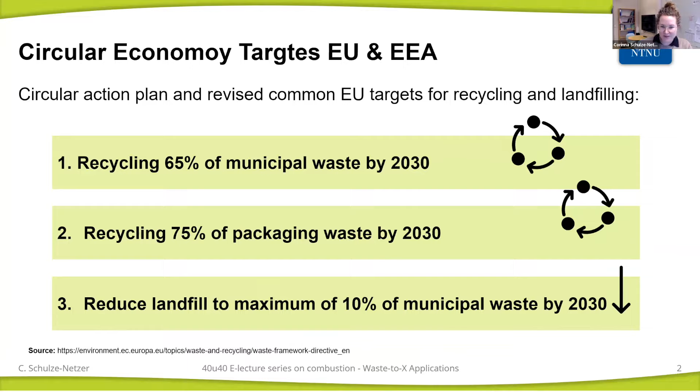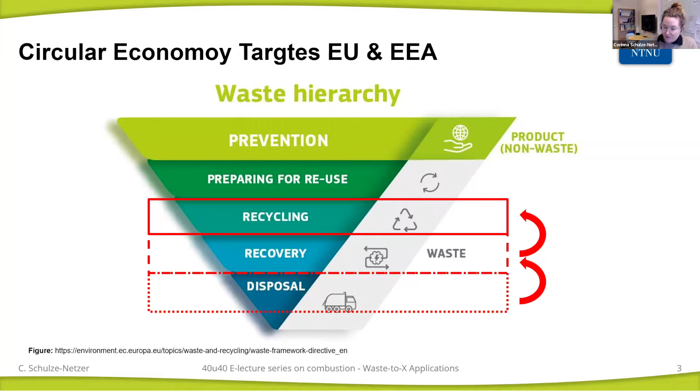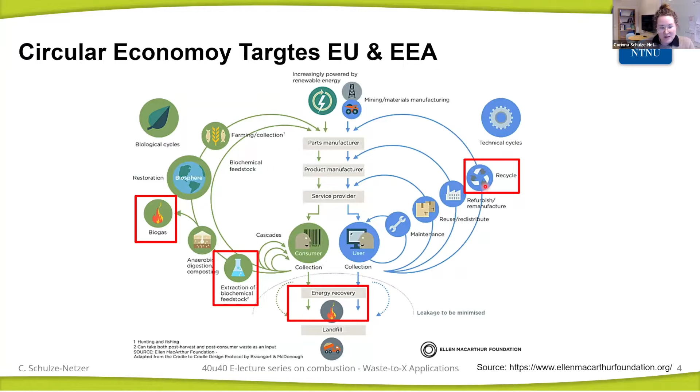So we have the typical flow: we mine resources, we have products, us as consumers, and in the future we need to increase the stock and recycling of mined materials, but also of bioresources. I've marked here all the processes that I see the combustion community as important to work on—energy recovery, directly burning waste in incineration plants, but also extraction of bioresources and biogas usage, and now with new trends in chemical recycling for plastic, being part of the recycling chain. These are all the fields I work in and that I base examples of in this presentation.

Nowadays, we also look more and more into sewage sludge. This has different reasons. We find more microplastic, for example, in sewage sludge. We also find more hormones or residues from pharmaceuticals, which question now if we can directly bring it out to the fields as we used to, or if it's better to treat this first chemically, get rid of pollutions, and then use only the nutritious part to go back to the agriculture.

Then there's refuse-derived fuel. This is basically a form of municipal solid waste. It gets selected specific materials, for example paper or plastics are combined and then put into this more convenient form. This can be used in any kind of firing process. It can be used in the cement industry, for example, or other high temperature applications in industry.

And then we have plastic waste, and we're talking here about the ones that are not recyclable. So everything that goes through classical mechanical recycling should go through there, but we're talking here about food packaging, for example, that consists of different layers and different polymers in one packaging. These are really difficult to recycle mechanically, so here we have huge potential to do that chemically, thermochemically. And then there are many more of these feedstocks, all the waste feedstocks that you can think of.

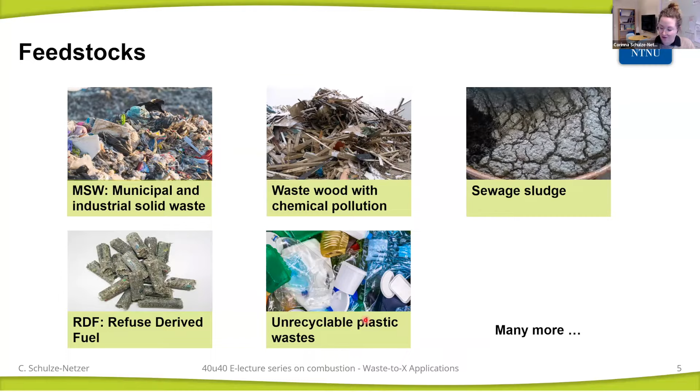And then we have the different applications. Once we have defined a feedstock in a way that we can use it in our numerical methods, we can then go for waste-to-energy application, pyrolysis and gasification for energy applications. Here we go for syngas that is supposed to be burned, or we can go also for pyrolysis and gasification for material recovery. Here we have different targets, then, as in the second step.

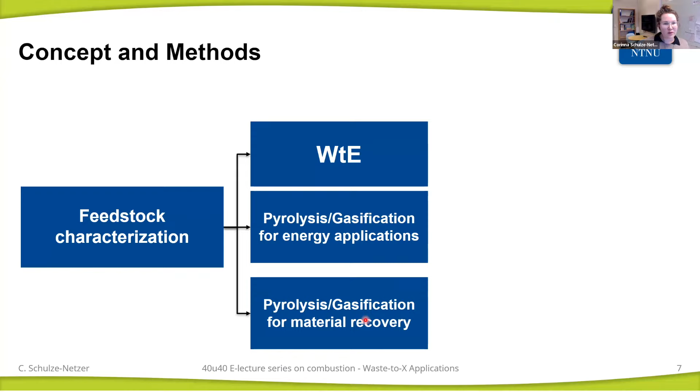And the methods that I'm going to introduce today for this is the feedstock characterization. We do that through a surrogate formulation and the use of detailed chemistry. And all of these applications, the multi-phase flow character of this, we calculate or model here using a stochastic reactor model concept. And then for the gas phase, depending on the application, we also use CFD.

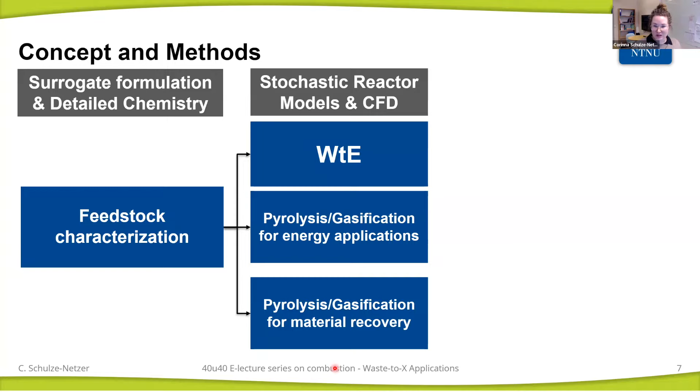Sorry, this was not meant to be like that.

The ultimate goal of these kinds of simulations, once we have done that, is on one hand we want to deliver input for process modeling for our colleagues from the process engineering department, and also provide input for sustainability analysis. And this goes to industrial ecology applications and life cycle analysis.

For waste-to-energy application, important of course is the emission formation. Here we have NOx, SOx, but also a quite significant amount of HCl. This comes from the chlorine in the feedstock, and many more, for example dioxins, which are very important to consider since they're heavily toxic. And then what is becoming more and more important is to understand how much of the CO2 is from a fossil source, since in waste-to-energy applications we have wood, paper, food waste, but then we also have plastics, rubber, and other materials. The taxation authorities are now keeping an eye on that, and we need to know how much of the CO2 is indeed from fossil resources, since we have to pay taxes for those.

But for bio-originated CO2, this is not the case. We don't have to pay extra taxes for these.

Then there is the pyrolysis and gasification application. Here we're looking forward to estimate the cold gas efficiencies, heating values of the gases. We try to estimate the need for cleaning for the next steps in the processes. And in energy applications, it's also interesting to know what are the emissions in the energy supply stage if we have this two-step process.

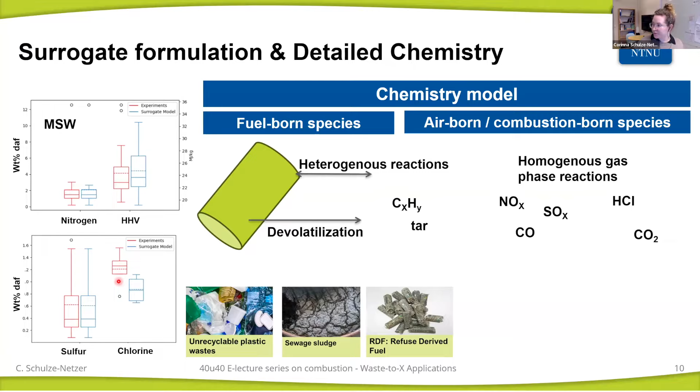So why do we use a surrogate concept? The idea is that we want to quantify the impact of the fuel variations of these daily or hour-by-hour varying fuels. And we're looking here for the average, but also for minimum and maximum concentration of certain elements, specifically with regard to emissions.

We want to optimize the process and feedstock. So we think here about feedstock engineering, for example. If you have a sewage sludge that has very high moisture content, is there something available close by, maybe from agriculture, that we could mix and make the fuel more ideal for our processes? And then we want to deliver the data for system analysis.

And how do we do that? We use different chemical and numerical representations. The best-known surrogate in the combustion community is the octane number of the fuel. When we go to the gasoline station, we tank an octane 90 fuel, and this is basically nothing else than a number that tells us that the real gasoline behaves like this specific mixture of 90% isooctane and 10% n-heptane.

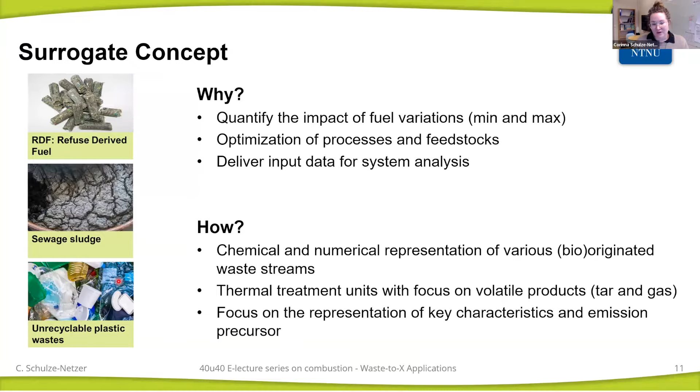And this same concept we use here, just that we don't use n-heptane and isooctane, but we use biomass species like cellulose, hemicellulose or different plastic species to represent our feedstock in a good way. And we try here to find the key characteristics and also target the emission precursors like fuel NOx precursors.

So this is our species pool in blue at the top that we're using. We have classical biomass species, cellulose, hemicellulose, different lignins, proteins, and those we have all borrowed from Politecnico di Milano, from all of these nice biomass schemes.

There are many different versions of the woody biomass. We use a rather old one now from 2011, and then there are updates and also expansions to algae biomass, for example, where we took some of the reactions from.

Then there are product species that represent products from reactions with inorganics. This means we are not carrying through all of the possible inorganics, but we say from these reactions some more ammonia can originate into the gas mixture. There's some CO2 and there are some sulfur species resulting from these species.

And then we have a set of plastic species, which are the most common ones found in waste. And then there's a lipid species, that is organic fat. Then we have these apparent global step reactions for the solid.

So on the very left, the bold one is the original surrogate species, and then depending on the species or the mechanism, they are decomposed in the solid phase. So cellulose activated here is still a solid. Char is a solid, and then everything that is marked green is the gas phase. There are different gas species and different tar species.

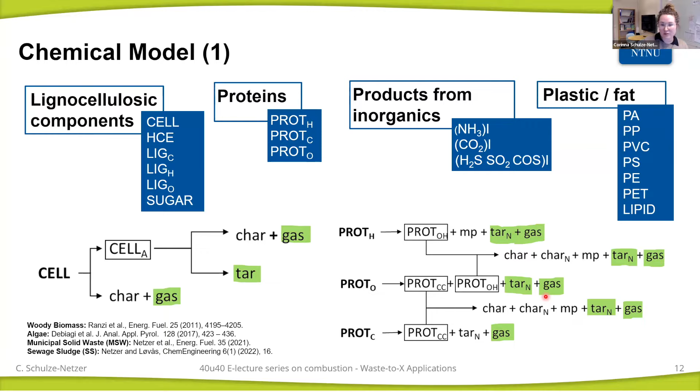And here, for example, for the proteins, we see that we release also tar species that include a nitrogen. It's going to be important then for the NOx calculation and others. These green marked species are the transition to the gas phase scheme, which comes on this slide. So we have 44 reactions in the solid phase. We have 188 gas phase species and around 3,000 reactions.

And these are just some highlights of this gas phase chemistry. I didn't put all of the reactions here. The largest hydrocarbon that we have is C11. This also originated from some mechanisms from the Politecnico di Milano. Then we have nitrogen-containing species. Here we have included pyrrole and pyridine from this reference here from Alzueta and Wu et al.

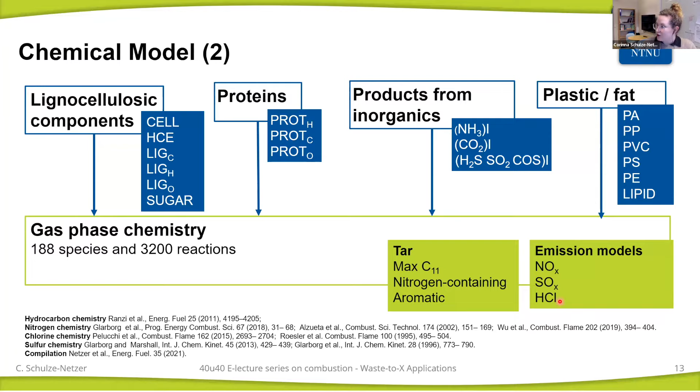From different publications. And then we have in the emission models a nitrogen chemistry that comes from Peter Glarborg's group, and the sulfur chemistry comes from the Danish group. This is all compiled into one reaction scheme, and then we can go through our applications. To match the combination of the surrogate species to our feedstock, we need to formulate the surrogate somehow. This is an example that we have done for sewage sludge, but for the others, this works very similarly.

So first, we decide on different species or categories that we want to include. So here for sewage sludge, we took all of the bio-originated species that we have, different proteins, the lignocellulosic species, and inorganics, and then of course ash and moisture. And we do, let's say, a very easy trick here. We just do a linear least squares fit to the ultimate component analysis that you usually get, you can do in the lab, or you find in literature for your specific feedstock. This tells you the exact number of carbon, hydrogen, and other elements that you want.

Then we have some additional conditions, and these are the specific ratios that we know already to be between cellulose and hemicellulose or different lignins. So these are ratios that we set manually. And then once we have composed the surrogate against the dry ash-free composition of the data, we mix in ash and moisture linearly in the amount that we need.

And here in the bottom, you see an example for that. So sludge is the experiment from the ultimate component analysis, and then the surrogate composition, where we match closely carbon and hydrogen, but also nitrogen and sulfur. And ash is just adopted as it is, so this will always match well in this approach.

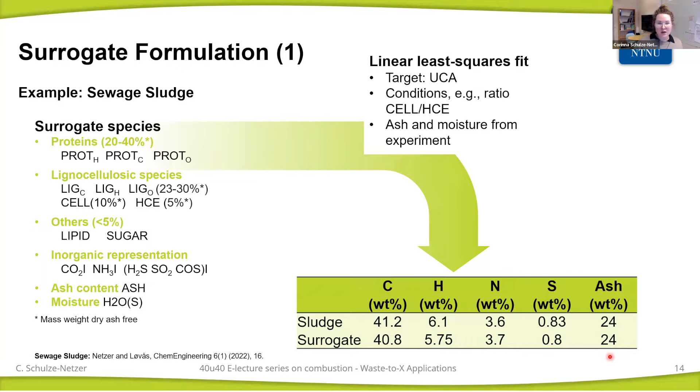The next step is then to test the composition in a TGA environment. This is done here using the stochastic reactor model that I will introduce a bit later on. And here are some examples for different feedstocks that we modeled. We have textiles, this in the top here, which is mainly cellulose. Then we have here a mixture of municipal solid waste and paper sludge. So the first one here is only municipal solid waste, and the bottom one is only paper sludge.

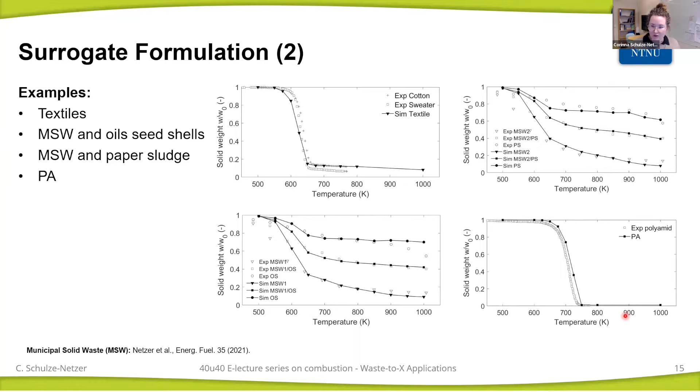And then we have a mixture of both, and we see that we keep all of the trends here very well. Then we have here another mixture of municipal solid waste and oil seed shells, which is from the same publication, these two. And then here's, for example, one of the plastic species. This is a polyamide, also known as nylon. So this is the chemical model.

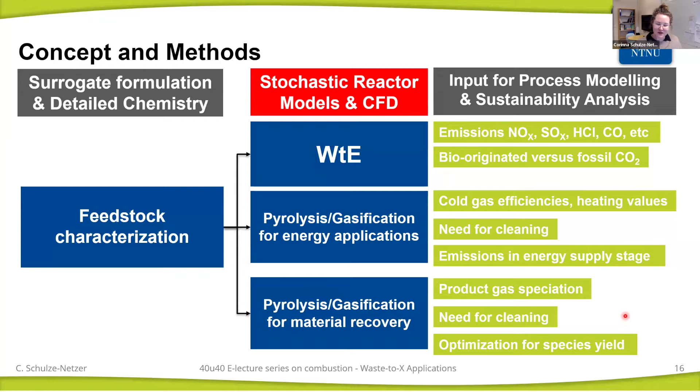Now let's move to the stochastic reactor model and the CFD simulation, how we use these to model the applications. So what is a stochastic reactor? Most of us use a homogeneous reactor. These are like the ideal reactors, quite standard in chemical industry and in combustion modeling, where we have usually one pressure, one temperature, and get a certain composition out.

Then the stochastic reactor was developed initially for engine applications, where we have a very highly turbulent flow, and we have regions with rich combustion and lean combustion, specifically if you think about direct injection systems. And there it was shown that it's really good to use these stochastic reactors. In the stochastic reactor, we have a 0D environment, but we divide the volume into certain fractions.

You can imagine it like a CFD simulation, but the subparticles don't have any volume, so they are just a vector of species, and those can then, depending on a mixing model, be mixed. And as a result, they will create a probability density function of temperatures and of species in this domain. And now for the multi-phase flow, we have expanded this model.

All these models are embedded in the code from LOGEsoft, a company that I worked for, and we still nicely collaborate up to today. And that is then here the stochastic multi-phase reactor that we have developed over the time. And in these, now we have divided these particles that we call stochastic particles. They're not particles yet, so these are vectors with species in, and these vectors we have divided into pore gas species, into bulk gas species, and in solid.

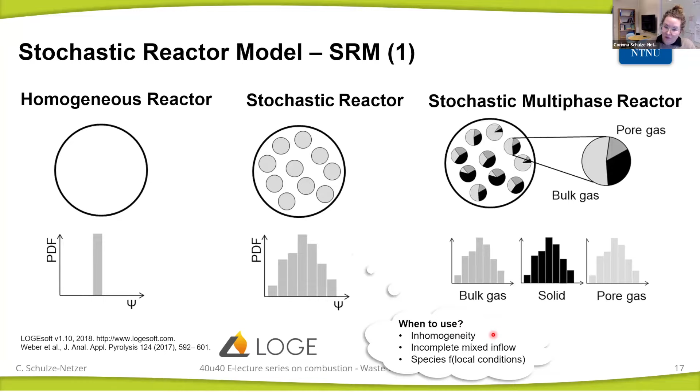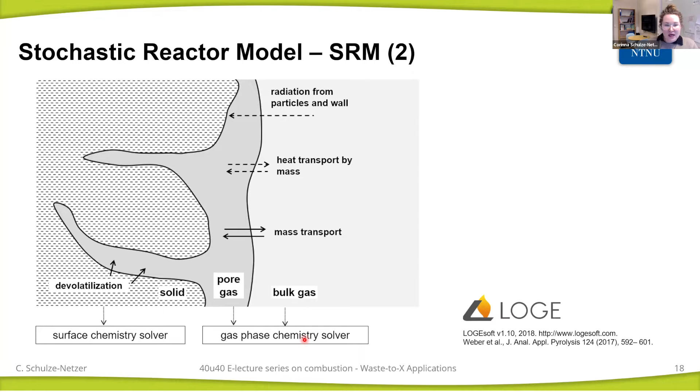Now, to model these different applications, we can run this stochastic reactor in different modes. Mostly I'm using two different modes. One is the plug flow reactor configuration, where we start at the reactor inlet, and then look into a disk how it changes over time. These are the particles that each have a solid, pore, and bulk gas composition, and depending on the mixing time that we define and the mixing model, they can exchange species.

And this mixing time and mixing model is one of the crucial input parameters of the model. The others are, of course, we have to make sure that we have the right amount of oxygen, for example, the temperatures have to be right, and then we're looking also into the residence time. The other configuration that we can use this model is the reactor network. Here we have the reactors divided into several units, and each of these units can have different inlets and outlets.

And in this configuration, where I put them into a series, this is very useful to calculate the grate fire in a waste incineration plant. And this is, in some slides, going to be the first application example for this. Yeah, we have applied this for different types of validation experiments, but also industrial size configurations. So we use that to calculate classical TGA experiments. We can use that for entrained flow reactors, rotary kilns, grate-fired furnaces, as I said, and it's going to be the next example, but also for fluidized bed reactors. And this is what I'm going to end this presentation with and what we're working on these days.

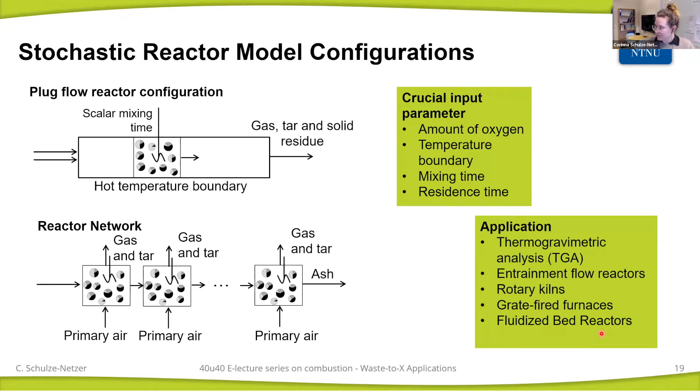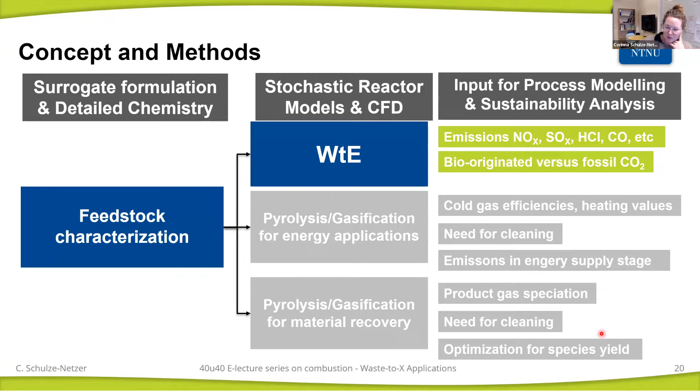So let me start with this waste to energy application. Here we're looking specifically for emission formation and the differentiation between biogenic CO2 and fossil CO2. Yeah, I'm not sure if everyone is familiar with the waste to energy plant, so that's why I have one overview how the process works.

Here on the left, we start by delivering the waste to a plant. Then this is the core here that comes after. This is the grate-fired furnace usually. So there are other types of incinerator, but the grate-fired furnaces are the most common one, where we have the fuel on the grate and air that goes through.

I'm going to explain this a bit more in detail on the right-hand side in a few seconds. Then the hot air or the flue gases go up, heat up some water or other fluid in the Rankine cycle that then converts the heat into electricity or provides some heat for district heating, for example.

And then a major part of the plant is the flue gas cleaning, which is quite extensive because we have all these different elements in. And then after the flue gas cleaning system, the flue gases go out to the atmosphere. Ashes are, of course, collected, and this is the part that we still have to landfill. So we start with a rather large volume of waste. We use the energy, and then we condense down the mass to the ashes. That is then much less volume to landfill.

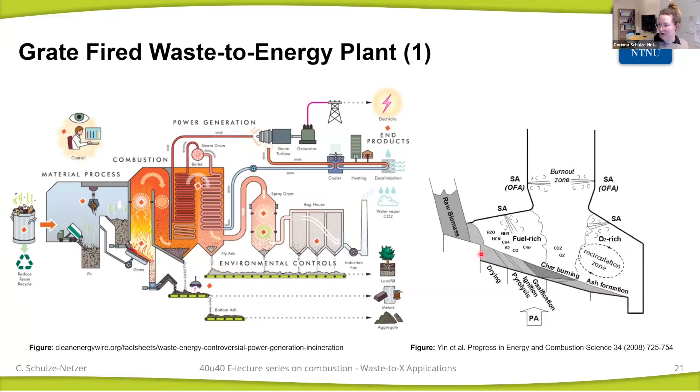What we do in our model is cut the fuel bed from the freeboard, everything of the gas phase, and first calculate what's happening in the fuel bed. And this is one example of how we do it using these stochastic reactors. This is a full plant scale experiment from literature. This is one of the fuel beds, and you see it's around 12 meters long and around 9 meters wide.

And we divided this bed into 3 rows according to the air feeders in this system. And we run one simulation for each of these rows. After that, we can divide these simulations and redistribute them to the network, to the grate. I will show in a second how we do that.

Most important to recognize here is that for these rows, even though this is one big grate, over the different processes of the bed we will have conditions that lead to a faster burnout. This is defined here by a short fire scenario, and we can have conditions in the bed where the fuel takes a bit longer to be fully burnt out, and these are then the long fire conditions.

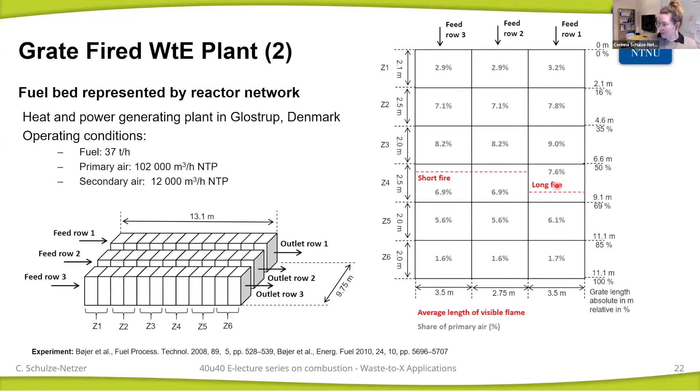We can see here a validation of these simulations. So here we feed in the solid feedstock, we run through, and the bed goes in this direction; this is the fuel bed length in these simulations. We have here the temperatures, the symbols are the experiments, and the lines are the different rows, and we see an average for the experiment as well.

And we see small differences between these reactors in the temperature. We see differences in how fast the oxygen is consumed for the different rows. This comes from the stochastics. So even though we start with similar input at the initial rows of the reactors, we end up with slightly different variations over the bed. We see this is also represented in the CO prediction and in CO2. For CO, we were always a bit too high compared to the experiment.

So of course there can be one reason that there's something that we have to look into in our reaction scheme, but on the other hand, we have these really big facilities where we have 12 meter long beds, 9 meter wide, and usually the measurement is done with probes that are around 6 meters long. So these are really long sticks, and then they try to measure at a certain point. So we're not really sure where this measurement point was.

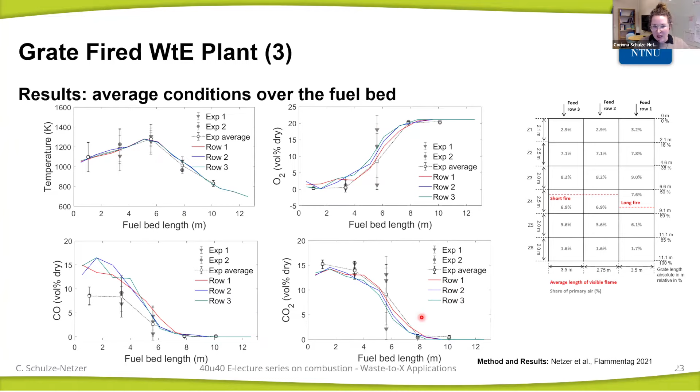And then to use these results later on, we transfer them to a 2D setup. So we have these different rows that give us a temporal solution. And if we now give them a dimension back by putting them next to each other and assigning the reactors to different zones on the grate, we can reproduce a two-dimensional field over the grate. Here we see the distribution within one reactor. We have different distributions in equivalence ratio and temperature, and each of these spots will have a certain emission or species concentration vector.

And for each of the times that we're interested in, we take those and we stochastically attribute them to a certain part. So the first, say 10 seconds, we assign to this first part of the reactor, and then we distribute this over 4 inlets and so on. And we do that for the second simulation and the third. And overall, we created per stochastic reactor 40 squares that we attribute to the grate. Overall, this is more than 200 inlets.

What we can see is that in this first phase, compared to other beds, also in the experiment, the fire sits very far up in front of the grate. Some others would sit a bit further in the middle here, but in this experiment, we see that the fire is very early. And we see that this is methane. Methane is directly released in the beginning of the bed. It gets up to a certain maximum and then it falls off. And here's then the char burnout. This is nicely captured by this method.

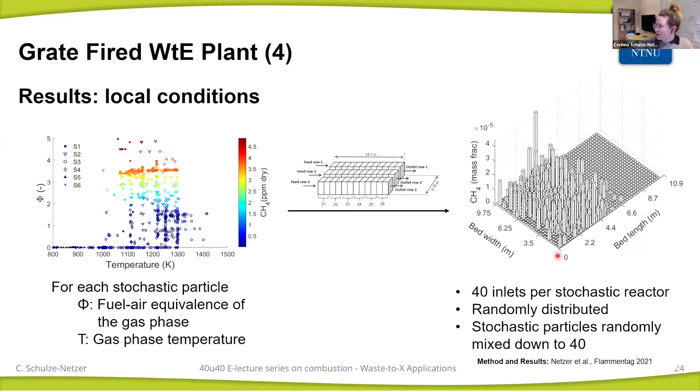And one of the next species I want to show is sulfur. Here we have also an experiment. This is how it looks in the experiment, how sulfur is released. Most of it in the beginning of the bed, and using our method, we can redistribute the results into this grate scenario and see that this makes sense, that we have most of the sulfur released in the first part of the bed and then none later on.

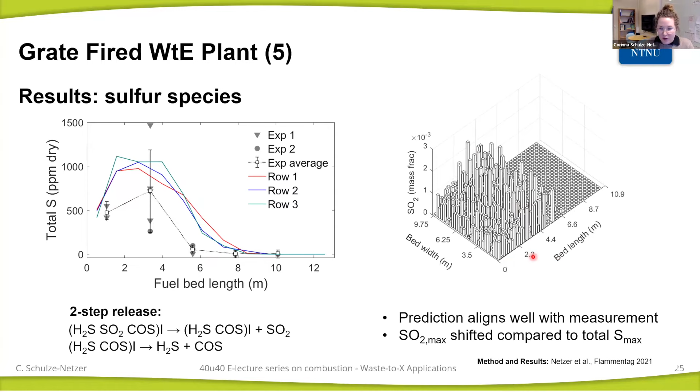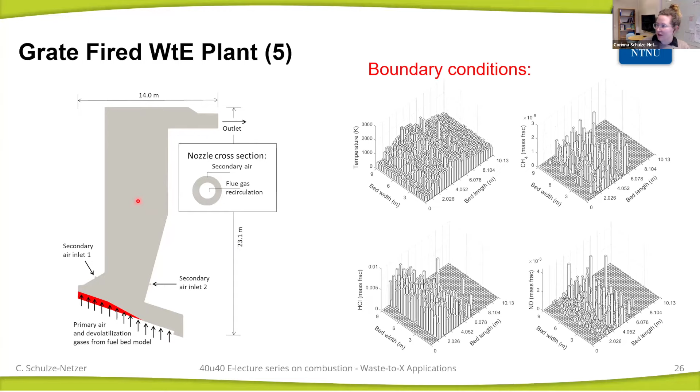These boundary conditions we provide as an input to the CFD model. This is quite large, so this is a 20-meter high furnace, which is 14 meters wide and 9 meters long. And we use CONVERGE CFD for this simulation. The result of these simulations you can see here. This is first the temperature field.

Here the fuel species, or the gas phase species, have been provided as an input. Then we see the combustion. Here we have a rich zone. The flame sits here in the center. And then in the secondary air part, we have again flue gases and air that is blown in at lower temperatures. We see that it's rather heterogeneous here in the bottom, and then with the secondary air coming in and mixing out these gases, we get a more homogeneous field.

Here's the lambda, so the air-fuel ratio. We see we have very rich conditions here, and then as the secondary air comes in, we're getting leaner and leaner.

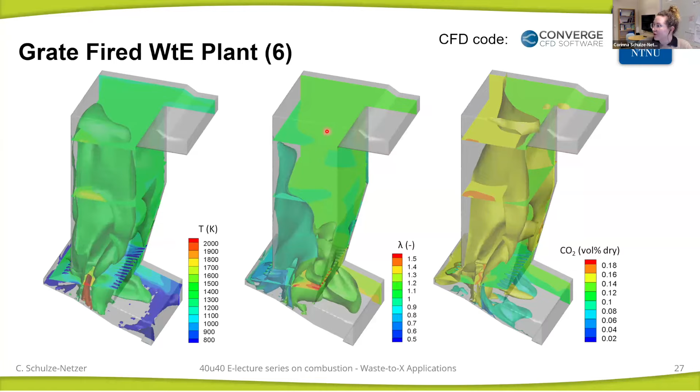This HCN also comes from larger tar species breaking down. In general, conditions change from a very heterogeneous system to a more homogeneous one, with a smaller range of temperatures and equivalence ratios.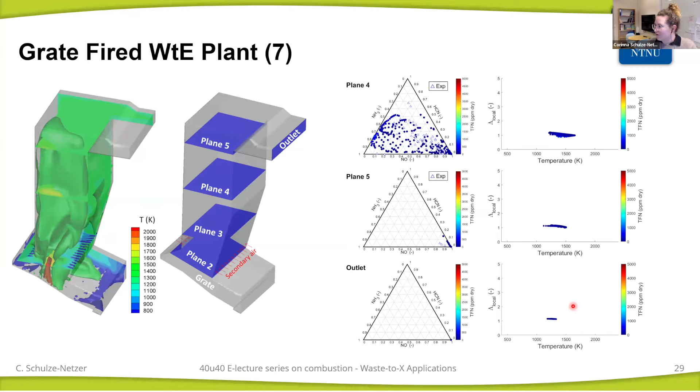The next concept I want to talk about is pyrolysis and gasification, for energy applications. We looked into cold gas efficiencies, wanting to understand the need for cleaning or potential emissions in the second stage.

The system we looked into here is sewage sludge treatment. First, we wanted to know the compositions and variation of sewage sludge going into this stock, the thermal conversion, which species we can generate, and then in the second stage, if we use these gases to produce heat or electricity, what emissions to expect. We investigated combustion in mild combustion conditions, because we have a rather low calorific gas.

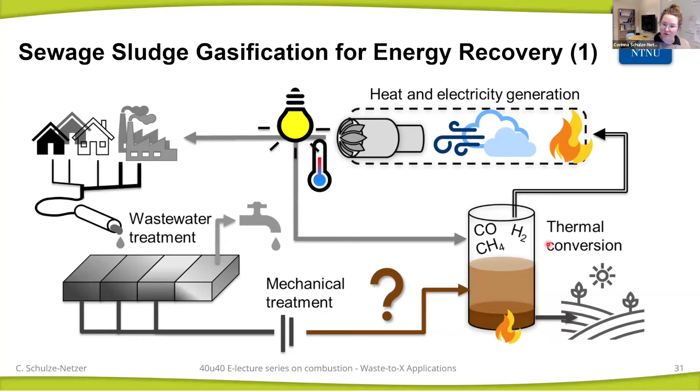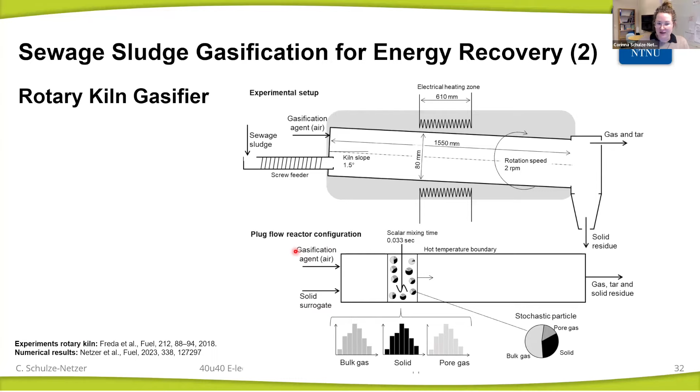The technical equipment we're calculating here is a rotary kiln gasifier. We took results from experiments in the literature and represented this in the plug flow configuration of our model.

In this study, we created different surrogates based on different experimental sewage sludge samples, 18 in total. In gray, for example, is the ash content which lies between them. In the red-orange colors are classical biomass species like cellulose and hemicellulose, which can originate from paper in the system. Then we have proteins and others in different combinations. For all these feedstocks we created a surrogate and fed them into our system.

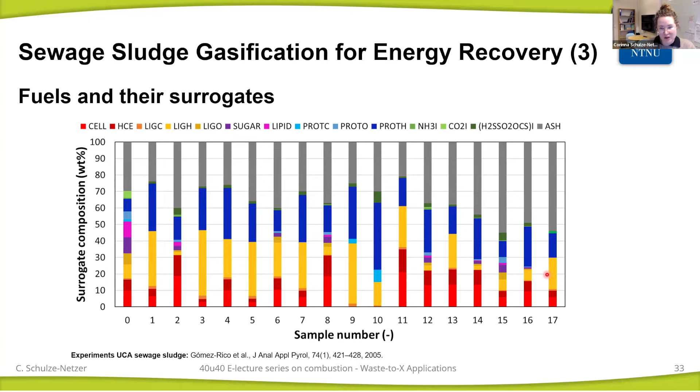For species modeling, we also look into the emission precursors. We've done another sorting here, this time by sulfur content, and we see that, not surprisingly, the more sulfur we have in the system, the more SO2, H2S, and COS we get in the final product gases. So there's a rather linear correlation.

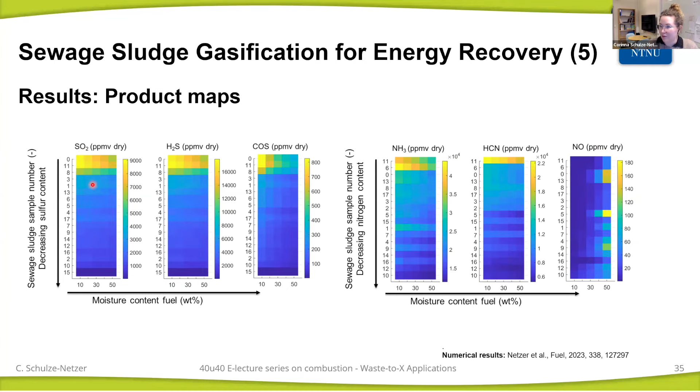From these simulations, we collected some of the results in the full species vector and went ahead to use them in flame simulations. I believe these were run by one of my colleagues, and these are Cantera flames.

What we did is use this complex distribution as the inlet, rerunning it in mild and classical combustion to compare the two systems. What we see is that for mild combustion, we get lower emissions of NO, for example, and of SO2, which is what we expect.

We wanted to know the impact of the fuel description and treatment of detailed species. For NOx, we found that the combustion regime was more influential than the fuel input, so independent of different nitrogen concentrations in the feedstock, we had fairly constant NOx emissions at the outlet after the mild regime. For sulfur species, however, where we don't have such a complex reduction and formation scheme, we see a strong dependency of sulfur oxide emissions in the combustion phase on the solid feedstock.

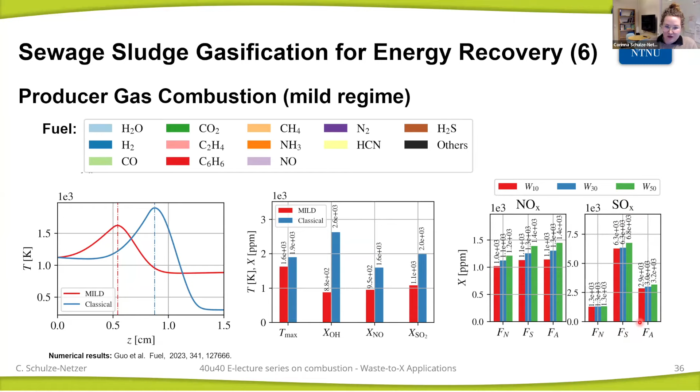The last example I prepared is pyrolysis and gasification for material recovery. Here again we look at product gas speciation, and what's more difficult than for combustion applications is that we stop the process earlier.

For incineration, once we find the right CO2 amount at the end, we only need to get the carbon balance correct. But here we stop in the middle, so it's more challenging to capture the tar species in the right amount and the right size at the right moment.

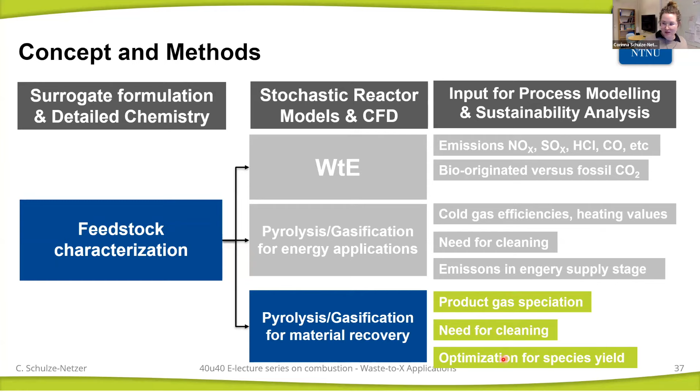First we have one reactor for the system containing the fuel bed, with inert particles forming the bed and particles of waste or biomass being converted. Once we have burnout of the fuel particles, we move to a pure gas phase solver where some ashes remain but are no longer reactive. Compared to the three phases we had before—bulk gas, pore gas, and solid fuel—we've now introduced a fourth phase, a second solid phase, which is the bed material.